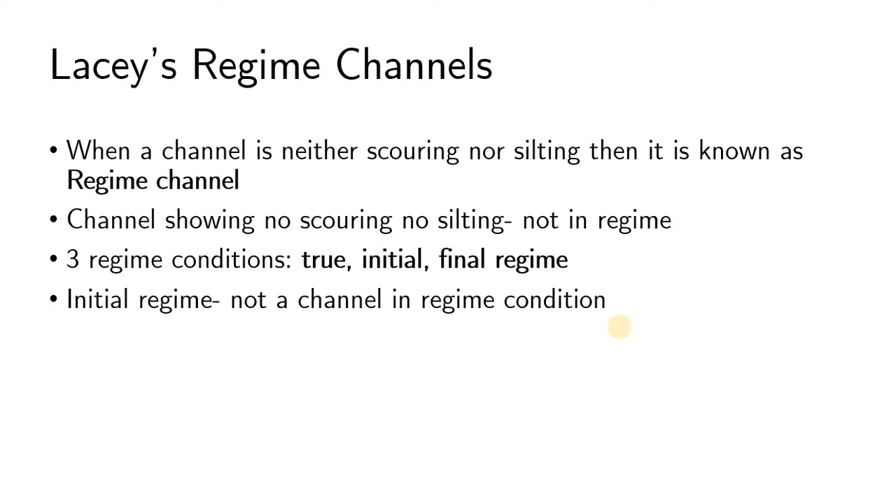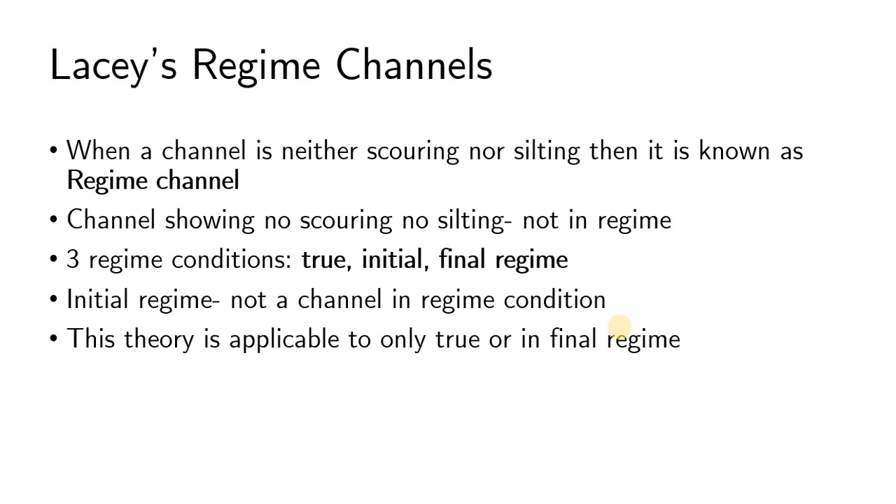Initial regime is supposedly not a channel in regime condition. This theory is hence applicable only to channels in true or final regime. Let us try to understand the true regime condition first. A channel shall be in the regime or stable condition if there is neither silting nor scouring. For this condition to be satisfied, the silt load entering the channel must be carried through by the channel section.

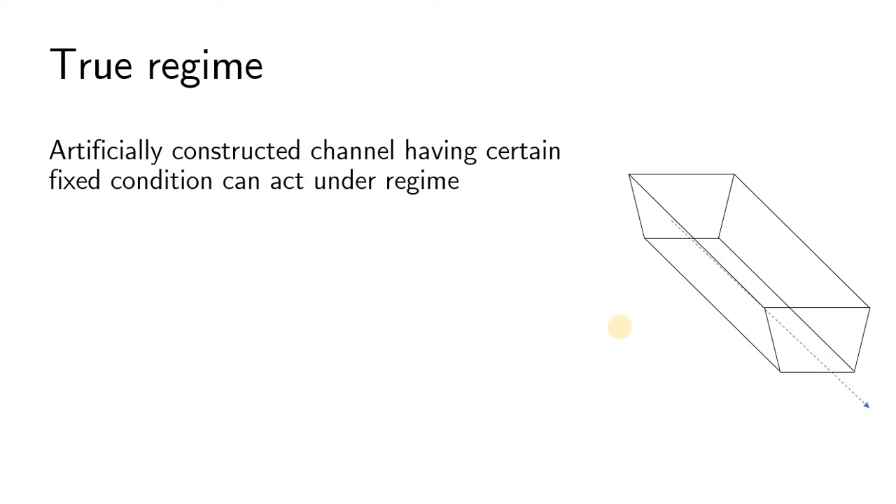Moreover, there can be only one channel section and one bed slope at which a channel carrying a given discharge and a particular quantum and type of silt would be in regime. Hence it needs to satisfy certain conditions: the discharge is constant and the flow is uniform, the amount of silt is constant, and the size and type of the silt are always the same. When a channel is flowing through a material that can be scoured easily, such soil is known as incoherent alluvium.

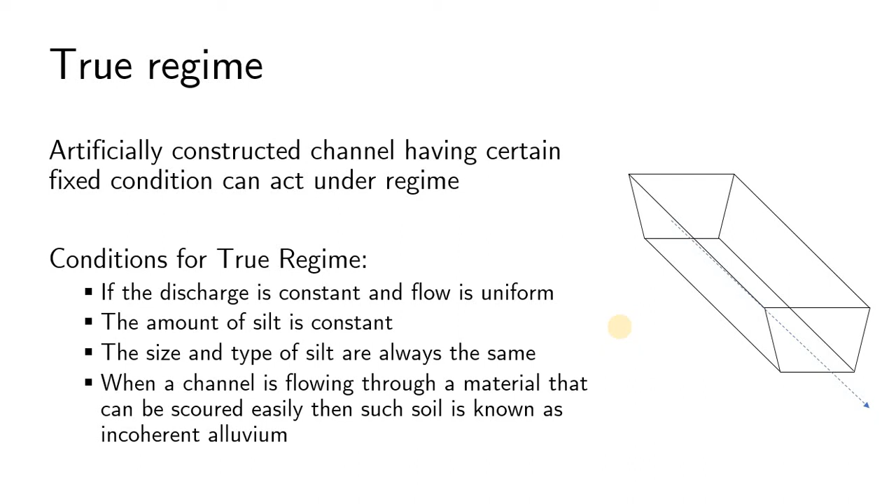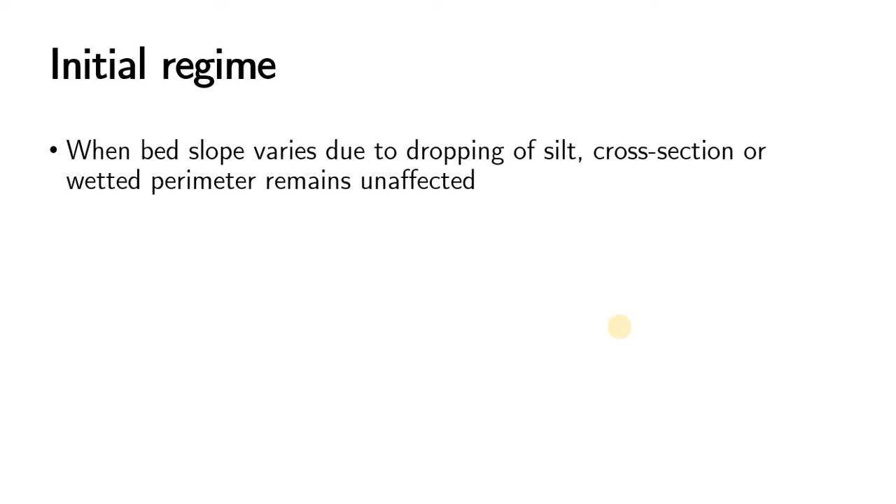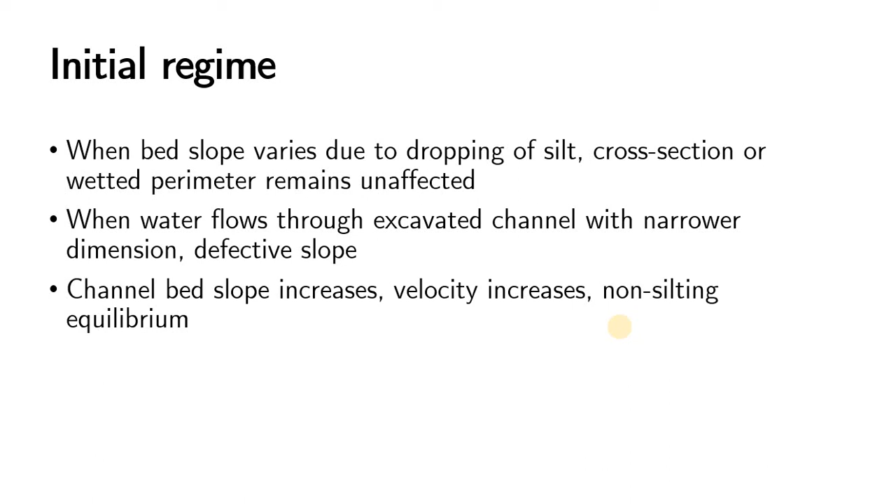The next one is initial regime condition. The bed slope varies due to dropping of silt, while the cross section or wetted perimeter remains unaffected. When water flows through an excavated channel with narrower dimension, it causes a defective slope; the channel bed slope increases, velocity also increases, and it may attain a non-silting equilibrium at times. So the banks are subjected to lateral restraint.

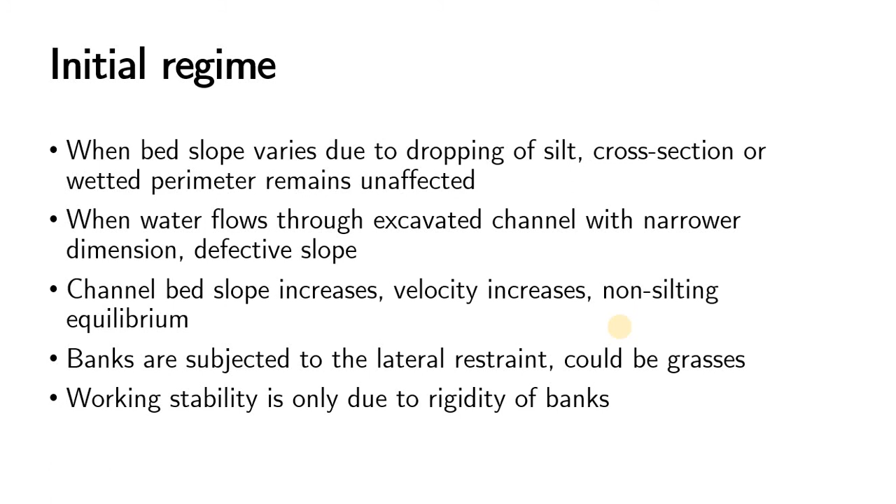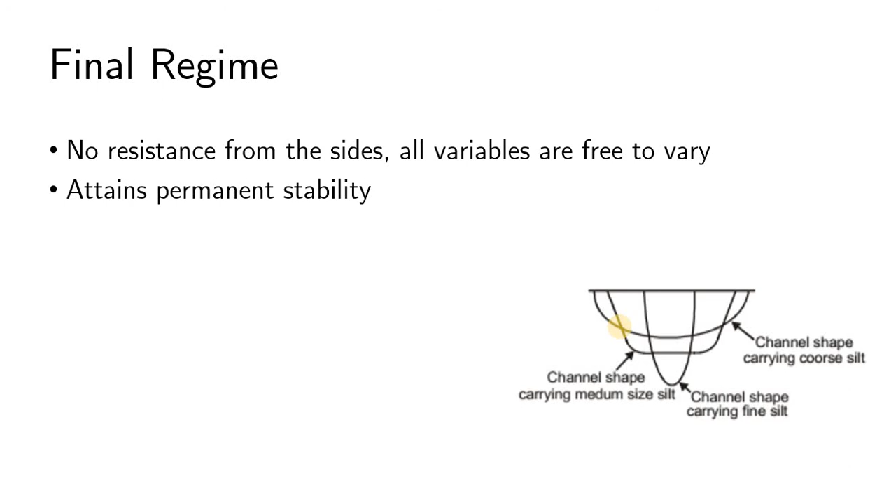So most often the channels which are in a state of initial regime may be grassed. They are full of grasses. So the stability is attained only due to the rigidity of banks. Let us go to the final regime condition. No resistance from the sides. All the variables are free to vary in this condition, and it attains permanent stability out of the three states.

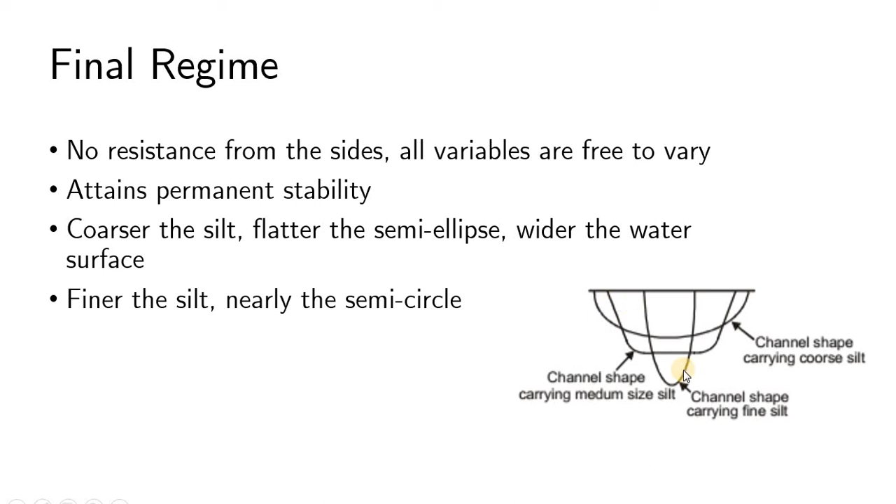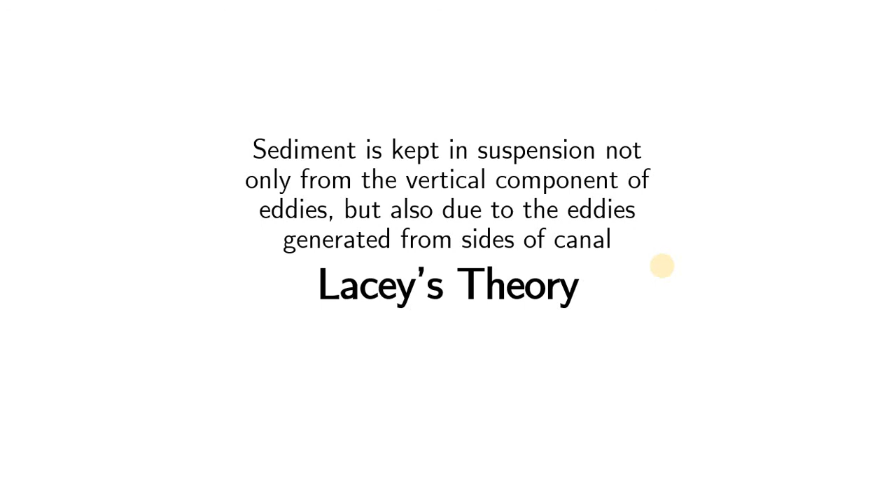Coarser the silt, flatter the semi-ellipse, and wider the water surface, which is evident from this diagram of the channel shape carrying coarse silt; in case of finer silt, it is nearly a semi-circle. Kennedy says sediment is kept in suspension just because of the vertical component of the eddies, but Lacey says that it is also due to the eddies generated from the sides of the canal. That's the gist of Lacey's theory.